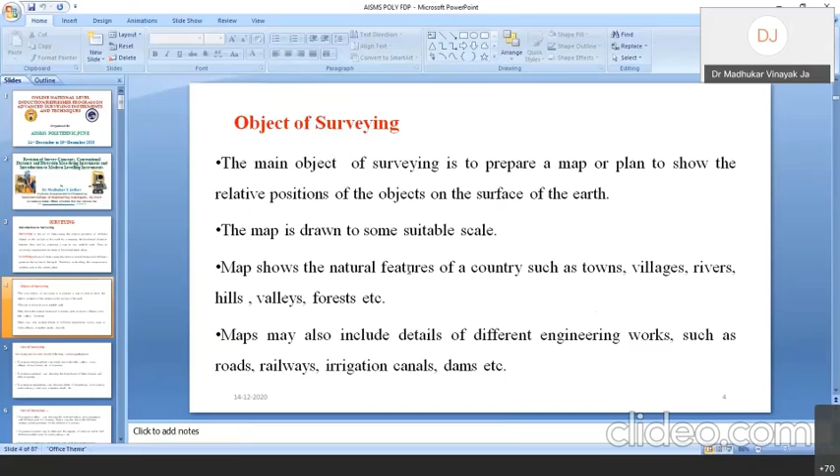Next, object of surveying. These objects of surveying are very much important as far as different applications of surveying are concerned. The object or purpose of surveying is to prepare a map or plan of a particular area. The map is drawn to a suitable scale. It shows the natural features of a particular area such as towns, villages, rivers, hills, valleys, forests, and so many other objects available in that area. Also, the map can include details of different engineering works such as roadways, railways, canals, dams, and other civil engineering projects.

Then uses of surveying, or we can say applications of surveying. In engineering, this surveying plays an important role, and there are various applications. The first application is to prepare a topographical map which shows the hills, valleys, rivers, villages, towns, forests, etc. of a particular area. By surveying that area, we can plot or show the details of hills, valleys, rivers, and so many other parameters or objects present in that area.

The second application is to prepare a cadastral map showing the details of boundaries of fields, houses, and other properties existing in that particular area. The third application is to prepare an engineering map showing the details of engineering works such as roadways, railways, reservoirs, canals, sewers, and so many others.

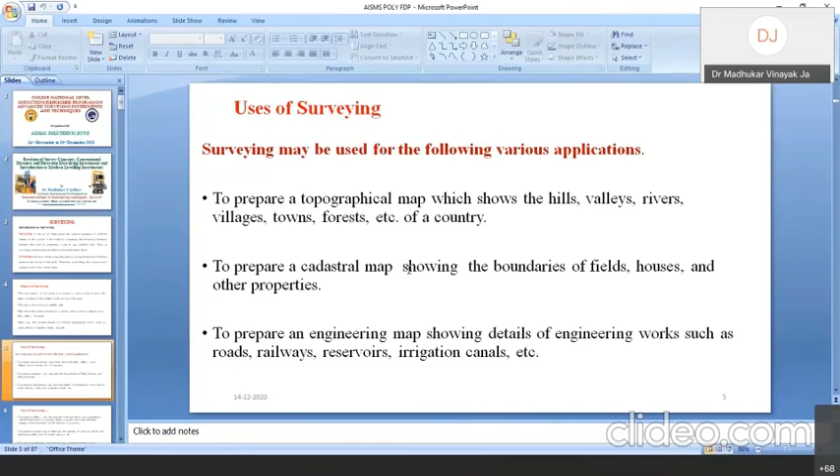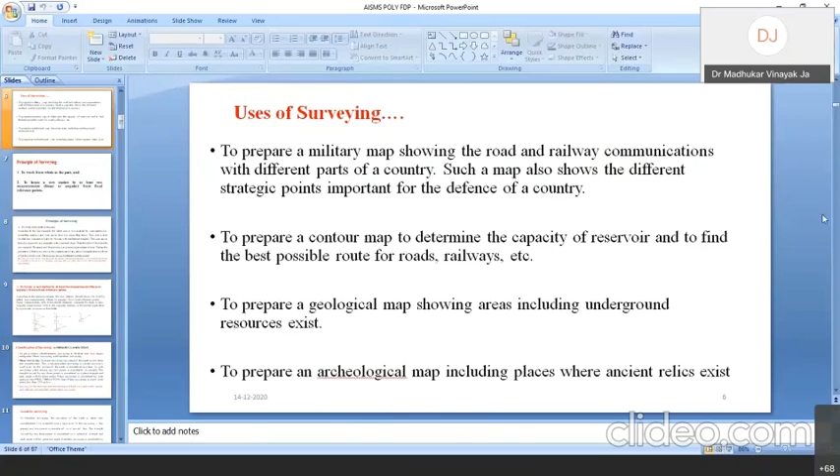Next application is to prepare a military map showing the roadways, railways, which are very much important for the military purpose. Also, such a map shows the different strategic points of importance for the defense of a particular country.

The next application is to prepare a contour map to determine the capacity of the reservoir and to find out the best possible route, maybe for roadway or railway, or also for canals and so many other civil engineering projects.

Next application is to prepare geological maps showing the areas including the underground resources, or we can say underground minerals which are existing below the ground.

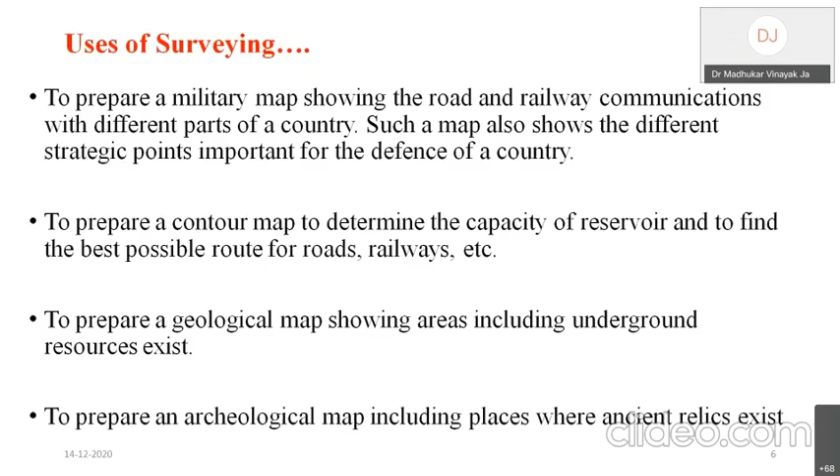The next application is to prepare archaeological maps showing the places of ancient importance which exist in a particular area. So these are the various applications of surveying used for different purposes in civil engineering.

Next important part of surveying is principles of surveying. These principles are very much important as far as surveying is concerned. In surveying, there are two important principles: one is to work from whole to the part, and second, to locate a new station by at least two measurements, maybe linear or angular, from a fixed reference point or fixed reference line.

Now we will see these principles one by one. First, to work from whole to the part. According to this principle, the whole area is enclosed by important points called control stations, and main survey lines called control lines. After that, this area is divided into a number of parts by forming well-conditioned triangles.

After that, measurement of the main survey line and measurement of whatever we have formed is taken using accurate instruments, and this is done to prevent the accumulation of error. During this procedure, if there is any error in the measurement of any side of the triangle, it will not affect the whole work. This error can always be detected and eliminated.

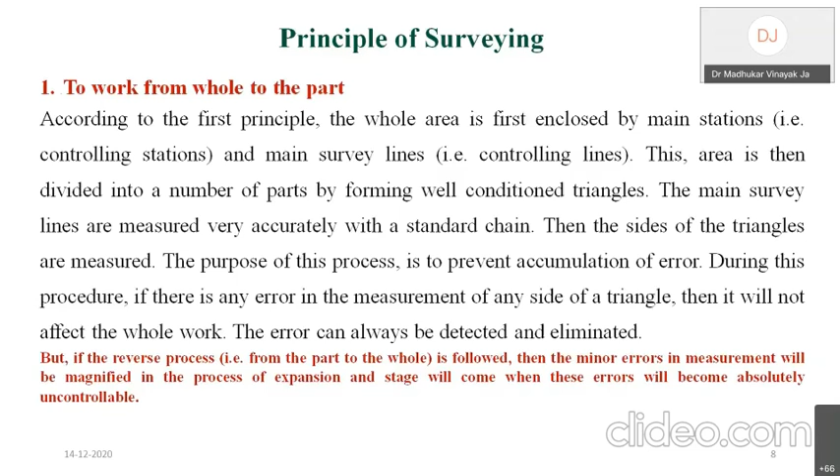To locate a new station.

Sir, Jadhav sir, sorry for the interruption, audio is breaking. Hello. Sir, are you mute? Sir, your audio is muted. Audible now. Hello, am I audible? Hello, no sir. Hello, yes sir. Yes, now audible, yes sir.

A new station by at least two measurements. So, as per this principle, a new station should be fixed by measurement from two reference points.

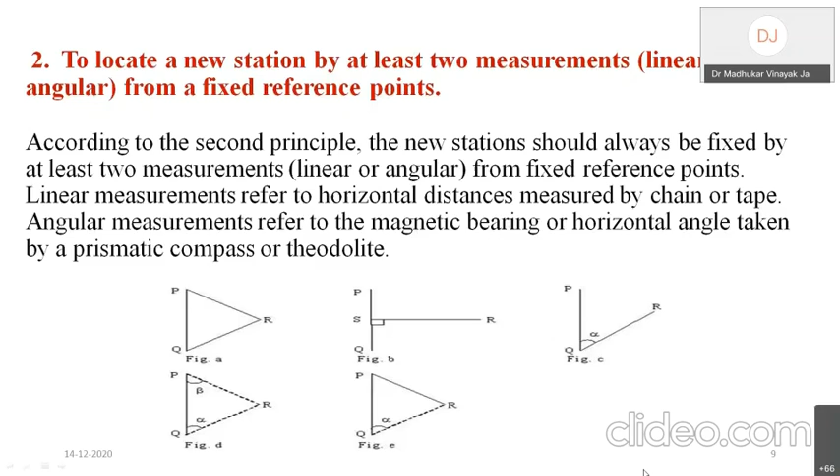Then next is classification of surveying. Whatever the different types of survey are there, we can classify survey mainly into two categories: first, primary classification, and second, secondary classification. We will see these one by one. First of all, primary classification. As per the primary classification, we can classify survey into plane surveying and geodetic surveying.

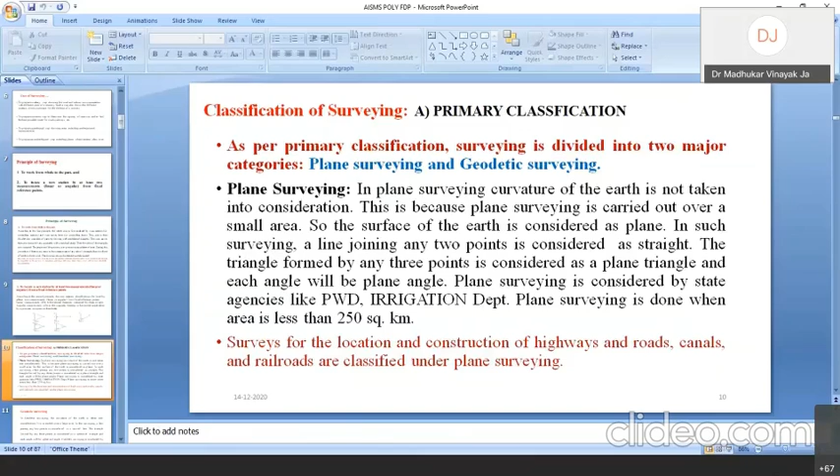First, plane surveying. In plane surveying, the curvature of earth is not taken into account, because plane surveying is carried out over a small area. The area under consideration is small, so the surface of earth is considered as a plane one. In such surveying, the line joining any two points is considered as a straight line. This plane surveying is conducted by state government agencies, maybe PWD, irrigation department, and is done when the area is less than 250 square kilometers. Generally, for the survey of highways, roadways, canals, this type of survey is done.

Then next is geodetic surveying. In geodetic surveying, the curvature of earth is taken into consideration, and this is extended over a large area. Meaning, when we want to do survey for a large area, we have to go for geodetic surveying.

In case of geodetic surveying, the line joining any two points is considered as a curved line, and the triangle formed by joining any 3 points is considered as a spherical triangle. The geodetic survey is conducted when the area exceeds 250 square kilometers, and generally this type of survey is performed by the Survey Department of India.

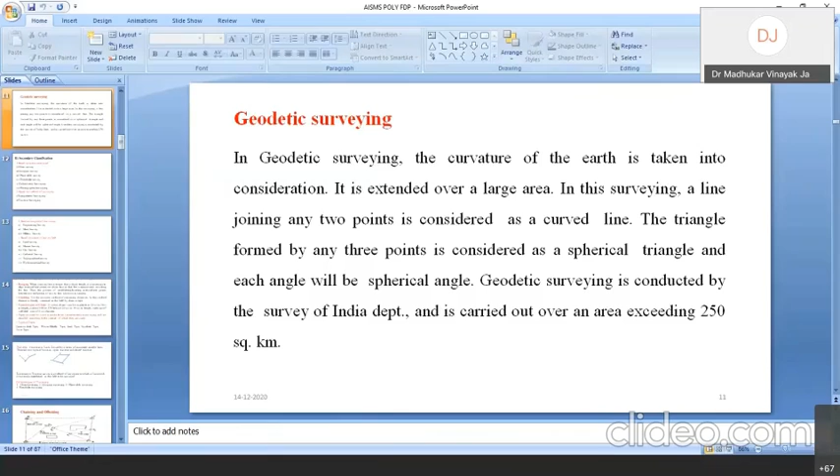So this is the main classification of surveying, that is, as per the primary classification, geodetic surveying and plane surveying. Then the next one is secondary classification. As per the secondary classification, we can classify the survey into different classes.

First, based upon the instrument used for the survey. When we are using the chain for surveying, that survey is called chain surveying. When we are using the compass, that particular survey is called compass surveying. So in this type of classification, the name of the instrument is given to that particular survey: chain survey, compass survey, plane table survey, theodolite survey, tacheometric survey, and photographic survey.

Next, based upon method of surveying. As per this classification, we can classify the survey into triangulation survey and traverse survey. In triangulation survey, we have to divide the area into a number of triangles, while in traverse survey, depending upon the project, the traverse may be open traverse or closed traverse.

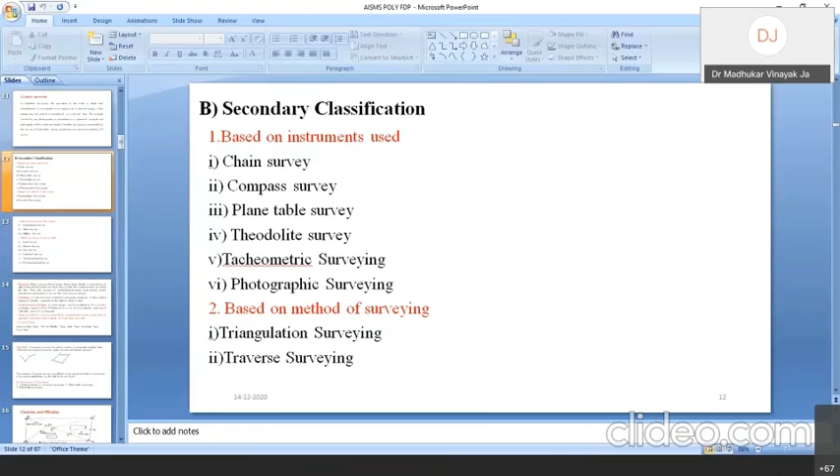Then the next classification is based upon the purpose of survey: engineering survey, mine survey, and military survey. And the last one is based upon the nature of the survey field, which can be classified into land surveying, marine surveying, city surveying, cadastral surveying, topographical surveying, and hydrographical surveying. So this is all about classification of surveying.

Then the next one is different terms used in surveying. Whatever different terms are used in surveying, I am going to discuss them in short.

First of all, ranging. When we want to measure the distance between any two points, we use chain or tape for the measurement of distances. Depending upon the distance between the first point and the last point, if it is more than one chain length or one tape length, we have to fix up intermediate points. The process of fixing up intermediate points between two endpoints of a survey line is called ranging of a survey line, or simply ranging. For ranging purpose, we have to use a ranging rod, a chain or tape, and arrows.

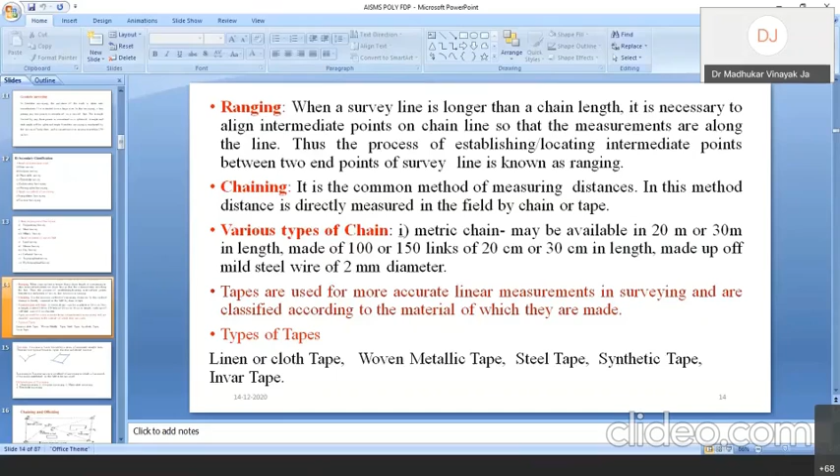Then there are different types of tapes which are used for accurate measurement of different survey lines. These tapes may be made from linen or cloth, may be a woven metallic tape or steel tape, or may be a synthetic tape or Invar tape.

Next, traverse. Traverse is nothing but a frame formed by a series of connected straight lines. This traverse may be of two types depending upon the type of survey: one is called open traverse and the second is called closed traverse. ABCD is this open traverse, and mainly for the survey of roadway, railway, canals, and sewer lines, we do the survey by means of open traverse, while for survey of dams and other surveys, we do the survey in the form of a closed traverse.

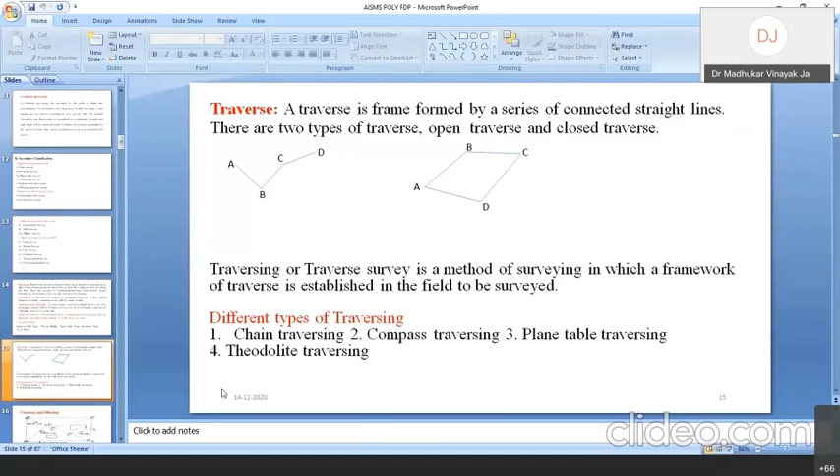Then depending upon the instrument used, there are different types of traverse. These are called chain traversing when we are using the chain for traversing purpose, compass traversing, plane table traversing, and theodolite traversing.

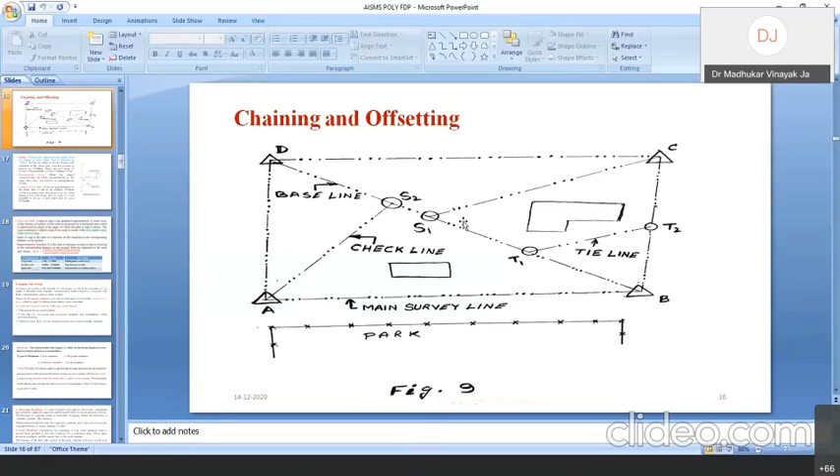Next one is the offset. Offset is a lateral measurement taken from an object to the chain line or survey line. There are two types of offset: one is called perpendicular offset and the other is called oblique offset.

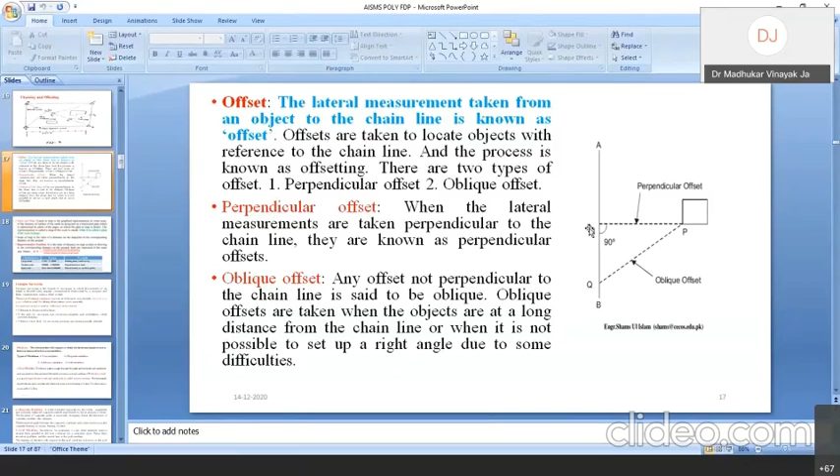In surveying, plan or map is the graphical representation. Whatever measurement we are doing, with that measurement we are plotting the map or plan with a suitable scale. This particular representation or plotting is called a plan if the scale is large, and is called a map when the scale is small.

Scale of a map is the ratio of distance on the map to the corresponding distance on the ground, or it is the distance on the plan to the corresponding distance on the ground.

An important thing in scale is the representative fraction. Whatever the scale of a map or plan, we always convert it to representative fraction, called RF. RF is the ratio of distance on the map, plan or drawing to the corresponding distance on the ground, with both distances expressed in the same unit. Hence RF is equal to the length of the object on the drawing to the actual length of the object on the ground.

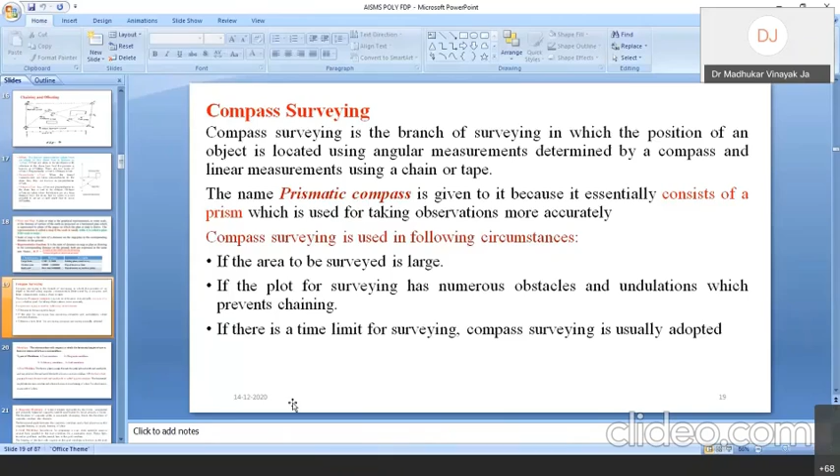The prismatic compass is graduated from 0 to 360 degrees clockwise, with graduations starting from the south end of the needle. See how the graduations are written on this particular ring: 0 is placed at south, 90 degree at west, 180 degree at north, and 270 degree at east.

The degree markings on the prismatic compass are divided either into half degree or into 20 minute intervals, and depending upon that, the least count of the particular prismatic compass is decided.

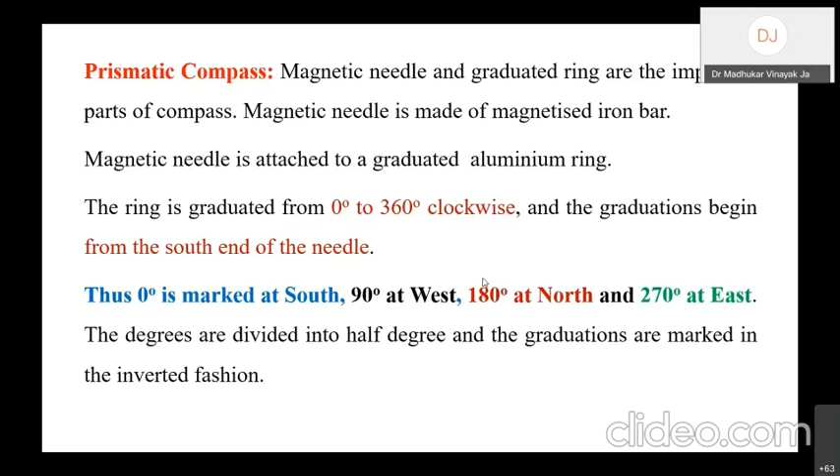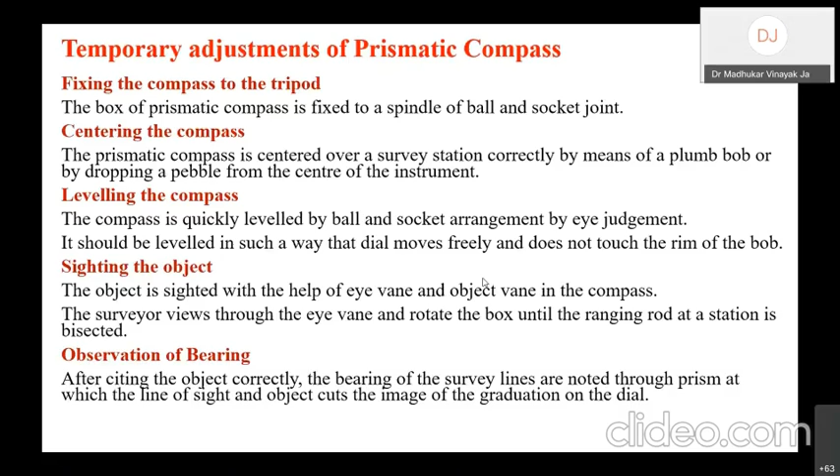When we want to use the prismatic compass for surveying purposes, we have to perform temporary adjustments. These include fixing the prismatic compass on the tripod stand, centering it, leveling it with the help of the ball and socket arrangement, sighting the object, and finally observing the bearing. All these temporary adjustments need to be performed when we want to measure the bearing of any survey line or perform survey work with the prismatic compass.

In compass survey, generally we use two types of compass: one is called the prismatic compass and the other is called the surveyor's compass. Mostly today we use the prismatic compass.

There is a difference between the prismatic compass and surveyor's compass. The first point of difference is that in the surveyor's compass, the needle is of edge bar type and also acts as an index, while in the prismatic compass, the needle is broad needle type but does not act as an index.

The second point of comparison is that the graduated ring is attached to the box and not to the needle in case of surveyor's compass, while in the prismatic compass, the graduated ring is attached with the needle, or you can say with the magnetic needle.

The third point of comparison is that the graduations in the surveyor's compass are in the quadrantal system, so the value of the bearing varies from 0 to 90 degree only, while in the prismatic compass the graduations are in the whole circle bearing system, so the bearing varies from 0 degree to 360 degree.

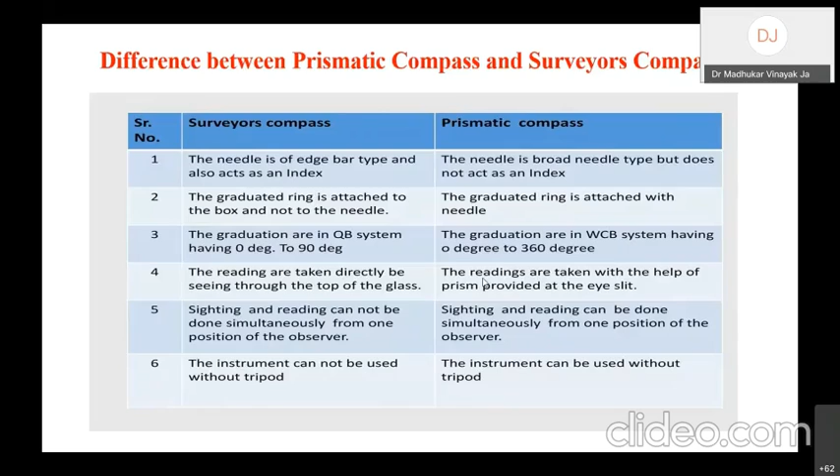Now let's compare whole circle bearing and quadrantal bearing. As we know, for measuring the whole circle bearing we use the prismatic compass, while for measuring the quadrantal bearing we use the surveyor's compass.

The horizontal angle made by any survey line with magnetic north in the clockwise direction is called the whole circle bearing, while the horizontal angle made by any survey line with north or south is called the quadrantal bearing, also known as reduced bearing.

The whole circle bearing is always measured clockwise with reference to the north direction, while the quadrantal bearing can be measured either clockwise or anti-clockwise, whichever is nearer to that particular line.

The value of the whole circle bearing varies from 0 to 360 degree, while the value of the reduced bearing varies from 0 to 90 degree.

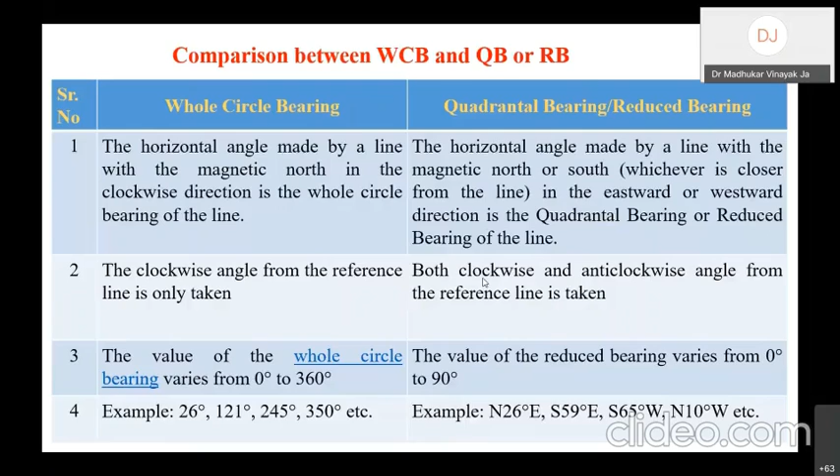In this sketch, how the whole circle bearing is measured is shown - it is always measured from north up to that particular line. The quadrantal bearing is measured either with respect to north or with respect to south, whichever is nearer to that particular line. The second sketch shows the reduced bearing.

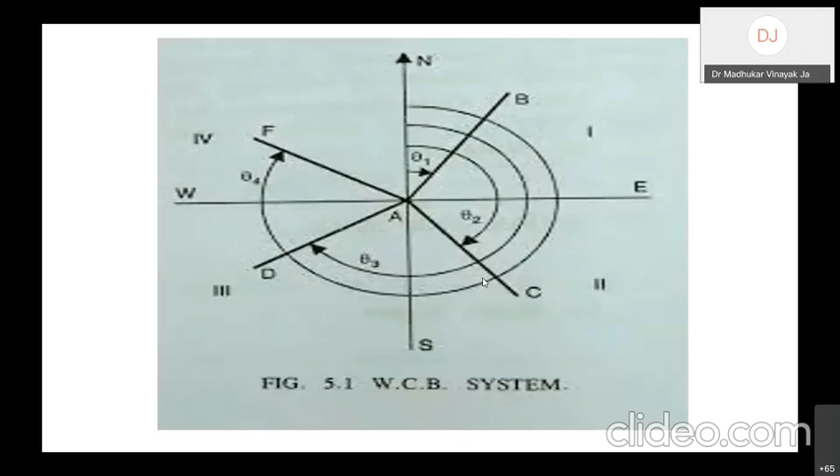Here the whole circle bearings are shown depending upon the position of the line. If the line is in the first quadrant, the angle θ1 is the whole circle bearing. When the line is in the second quadrant, θ2 is the whole circle bearing. When the line is in the third quadrant, θ3 is the whole circle bearing. And when the line is in the fourth quadrant, θ4 is the whole circle bearing of that particular line.

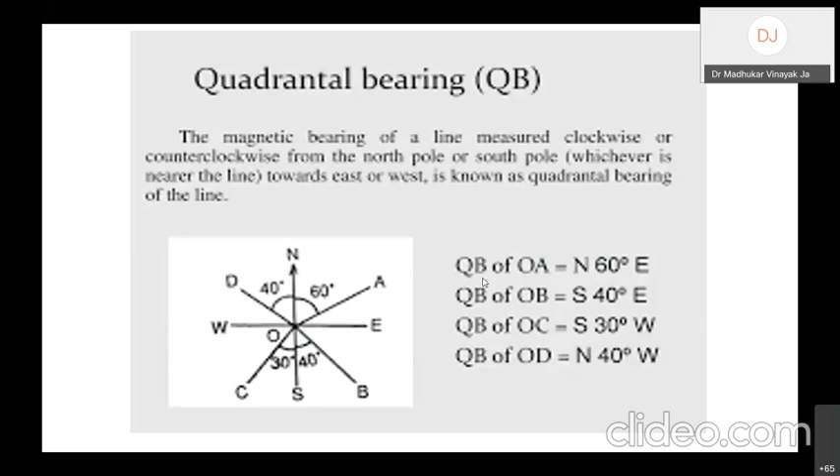Here the quadrantal bearings of different lines, depending upon the position of lines, are shown.

For the second quadrant, quadrantal bearing is equal to 180 minus whole circle bearing. For the third quadrant, reduced bearing or quadrantal bearing is equal to whole circle bearing minus 180 degrees. And for the fourth quadrant, reduced bearing or quadrantal bearing is equal to 360 degrees minus whole circle bearing.

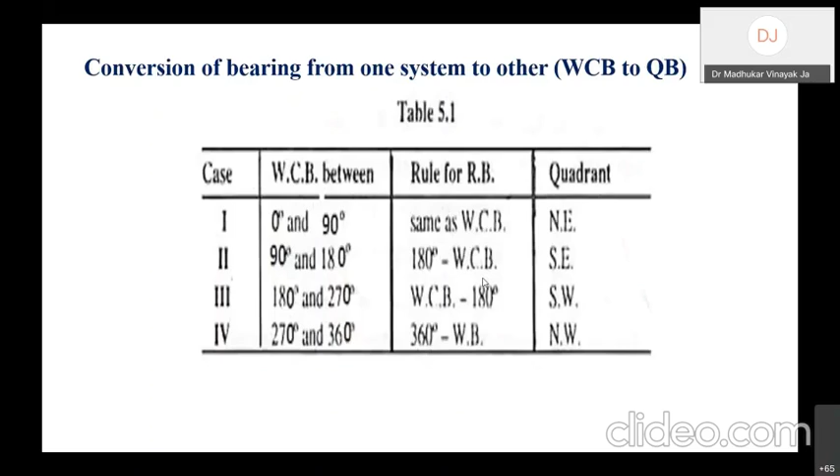Fore bearing and back bearing. This particular concept plays a very important role as far as prismatic compass survey is concerned. Fore bearing is nothing but when we are measuring the bearing of a survey line in the direction of progress of that particular survey line; that is called fore bearing.

As per trigonometry, fore bearing and back bearing always differ by 180 degrees. Hence we can write the formula: back bearing of a survey line is equal to fore bearing plus or minus 180 degrees. This is a very important formula. Once fore bearing is known, we can find out its back bearing, and if the back bearing is known, we can find out its fore bearing.

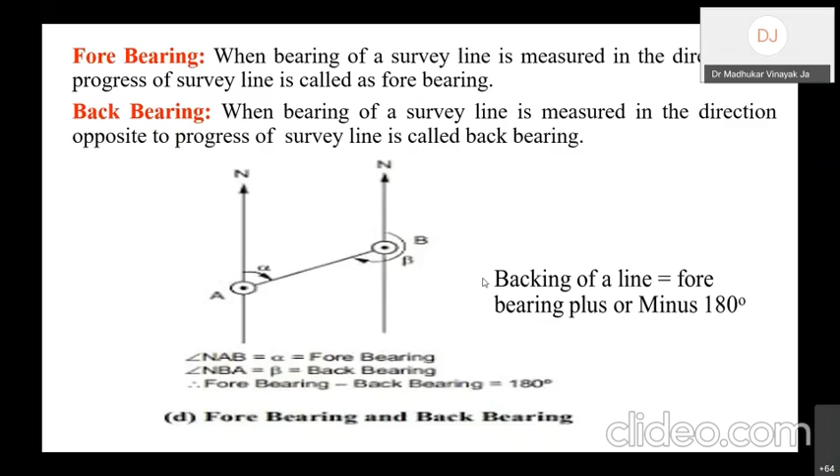In case of prismatic compass survey, local attraction plays a very important role. Depending upon the local attraction, whatever readings we are taking may be correct or incorrect. While performing the survey, the magnetic needle sometimes gets disturbed from its normal position under the influence of some attractive forces. Such influencing force is called local attraction, and due to that, there may be error in the observed fore and back bearing of the line, so the observed fore bearing and back bearing will not be the correct ones, and hence the difference in fore bearing and back bearing will also not be correct.

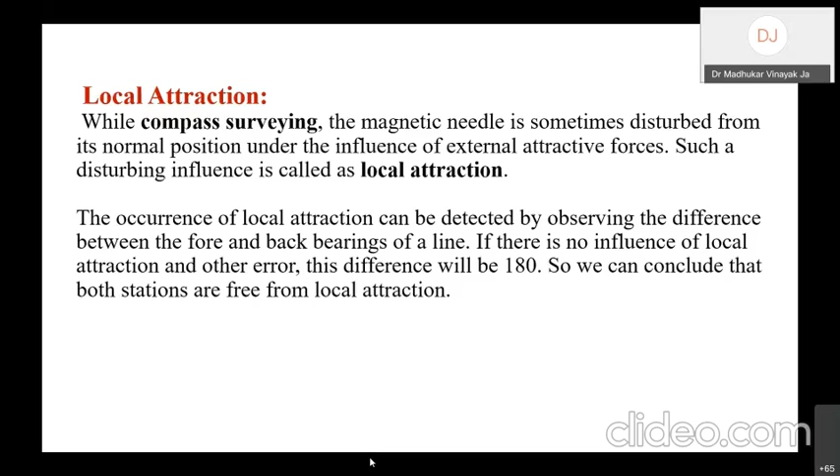Hence, when we want to go for plotting, we have to find out the local attraction at that particular station, and then correct whatever observed fore bearing and back bearing of different lines by applying the local attraction correction to that particular points or stations.

Declination. This concept of declination is also one of the important concepts as far as compass surveying is concerned. The horizontal angle between the magnetic meridian and the true meridian is known as magnetic declination. Depending upon the position of magnetic north, there may be a magnetic declination, either towards the east side or towards the west side. When we want to find the true bearing of a survey line, we use the formula: true bearing of a survey line equals magnetic bearing of a survey line plus or minus magnetic declination. We use the plus sign if the declination is towards east, and the negative sign when the declination is towards west.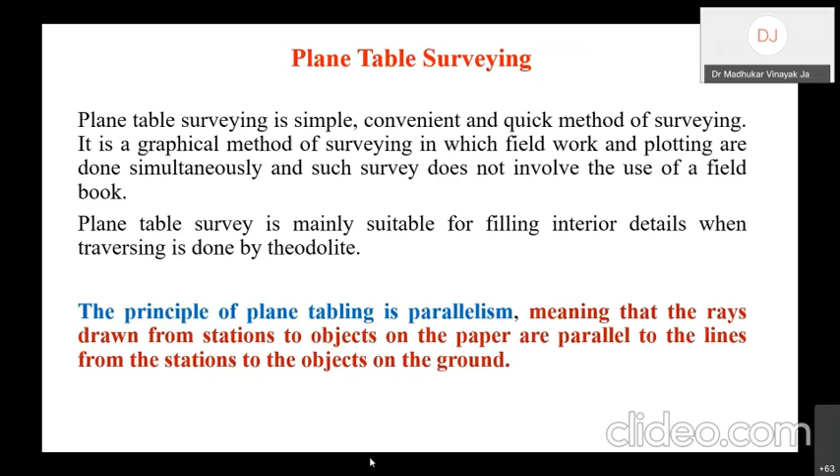Now this plane table survey has one important principle: the principle on which plane table survey depends is parallelism. That is, the rays drawn from the station to the object on the paper are parallel to the line from the station to the object on the ground. So on this particular principle, all the methods of plane table survey are working.

Different accessories which are used in plane table survey. So plane table or drawing board.

This particular plane table has a size of 750 mm by 600 mm and it is made from well seasoned teak wood or pine wood. The top of this table is made plain, and at the bottom there is an arrangement to fix this drawing board or plane table on the tripod stand with the help of a wing nut. Another accessory is called the spirit level, used for leveling the table.

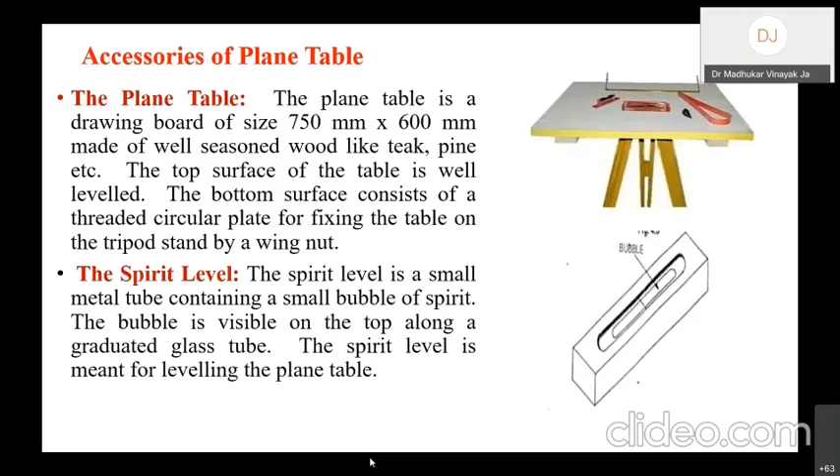Alidade plays a very important role as far as plane table survey is concerned. There are two types of alidade used in plane table survey: plain alidade and telescopic alidade. When the extent of survey is small, we use the plain alidade, and when the survey covers more length, the telescopic alidade is used.

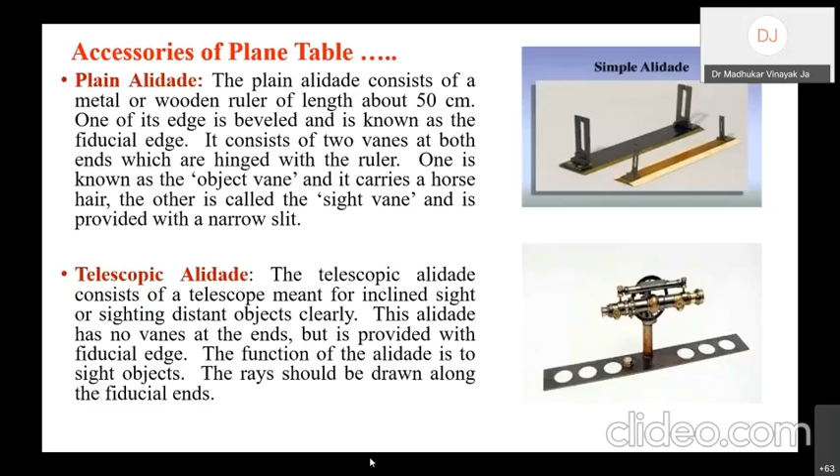In case of plain alidade, there are two vanes: one is called the object vane and another is called the eye vane. With the help of these two vanes, we can sight different objects while performing the plane table survey.

The next accessory used with plane table survey is the trough compass. Mainly for marking the north direction, we use this trough compass, which contains a magnetic needle.

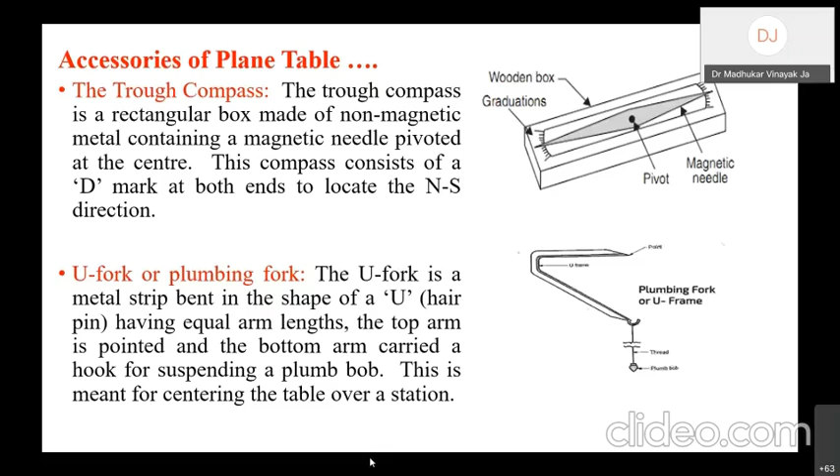The next important accessory used in plane table survey is called the U fork or plumbing fork. As the shape of this is like the letter U, it is called the U fork or plumbing fork. This tool is mainly used for transferring a ground point onto the drawing sheet, or a point that already exists on the drawing sheet onto the ground. So the U fork is very important for transferring a point from ground to sheet or from sheet to ground.

Uses of plane table survey: a compass survey cannot be carried out in industrial areas of a town because in industrial areas there are steel structures, and due to these steel structures there may be chances of local attraction in the observed reading. Hence, in such areas plane table is more suitable.

Also, plane table can be used for preparing small and medium scale maps where great accuracy is not required. This plane table survey is speedy, easy, and fairly accurate for doing the survey. Plane table can also be used to plot a developed area on the previously plotted plan of an existing area.

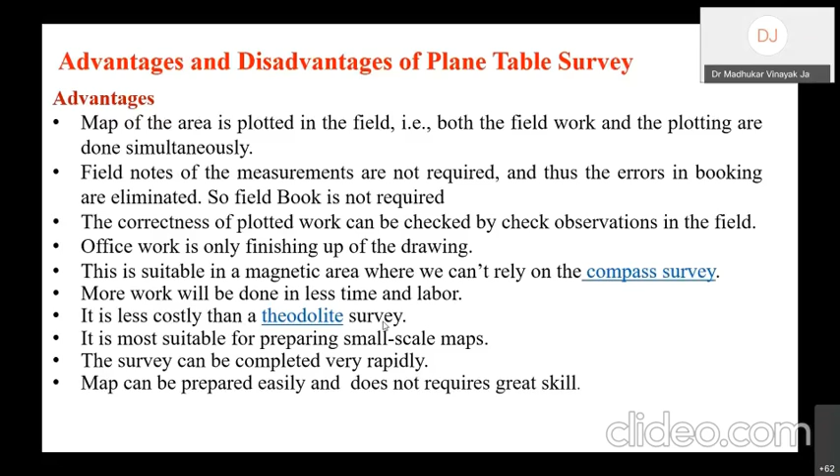Also, this survey is done within a short period of time, and the labor force required is less in number. When the budget allotted for the survey is less, we can use plane table survey instead of theodolite survey. It is also the most suitable method for preparing small scale maps, can be completed rapidly, or at a fast rate, and the map can be prepared easily without requiring great skill.

Disadvantages: Plane table survey is not suitable for work in wet climate, rainy season, and places where high wind predominates. If the area to be surveyed is large, frequent changes in the size of drawing sheets are required, so in such an area it is not possible to perform the plane table survey.

If the sun is bright, plotting may be difficult due to the strain on the eyes. Also, it is not very accurate for large scale survey as compared to compass and theodolite survey.

Another disadvantage is that the instrument and its accessories are heavy and cumbersome, and there may be chances of loss of any of the accessories. Lastly, since the field notes are not maintained, it is inconvenient to calculate quantities or to replot the survey to a different scale if required.

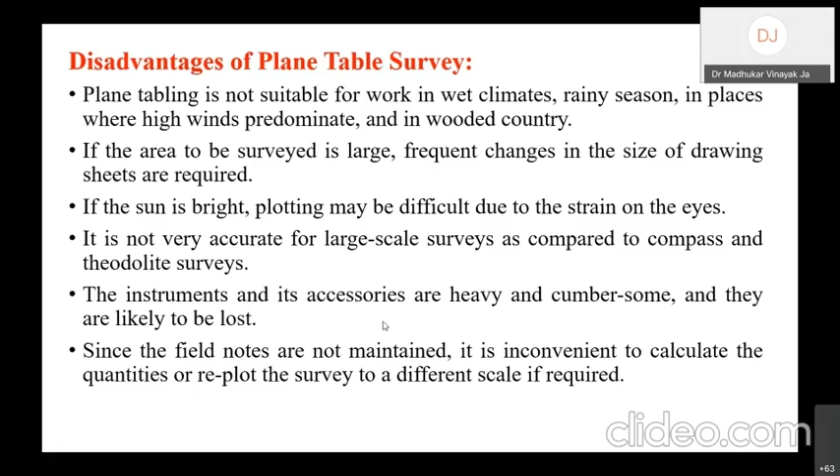So all these are the different disadvantages of the plane table survey.

Procedure for setting up of the plane table survey: first, select the station. Then set the plane table on the selected station and fix the plane table on the tripod stand. Then level the table properly, fix up the drawing sheet on the plane table, and properly center the plane table on the given station. Then, most importantly, mark the north direction.

Depending upon the different stations, we have to go for orientation of the plane table. When plane table survey is conducted by connecting several stations, after shifting the plane table we have to do the orientation, which means keeping the table parallel to the line drawn from the previous station.

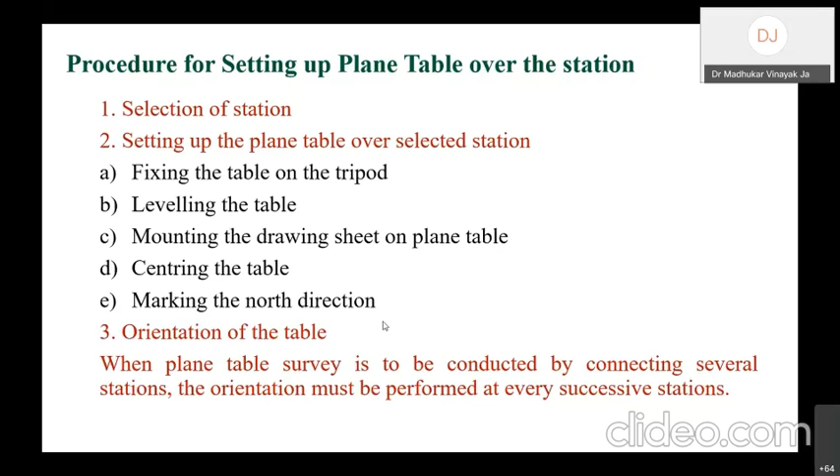Orientation of the plane table can be done by two methods: one with the help of a magnetic needle, and the second by the backsighting method. I will go somewhat fast because the time required for the presentation is more than what is left.

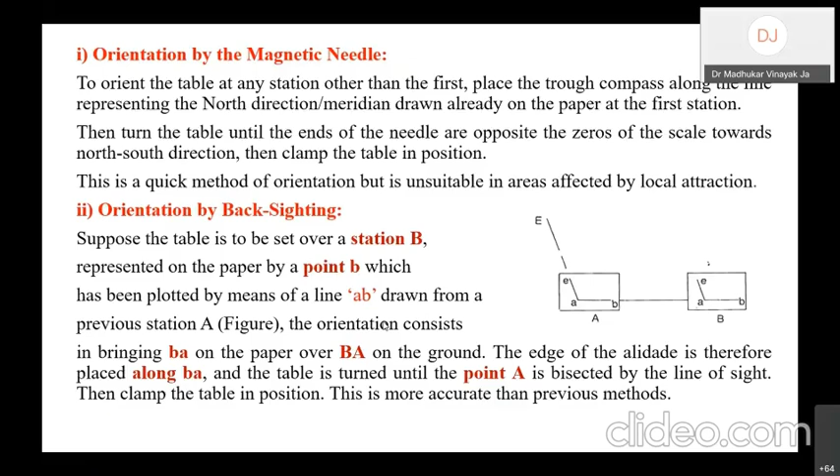Methods of plane table survey: plane table survey can be performed by four methods. One is the radiation method, second is the intersection method, third is the traversing method, and fourth is the resection method. Out of these, we will see the first two methods in short, starting with the radiation method.

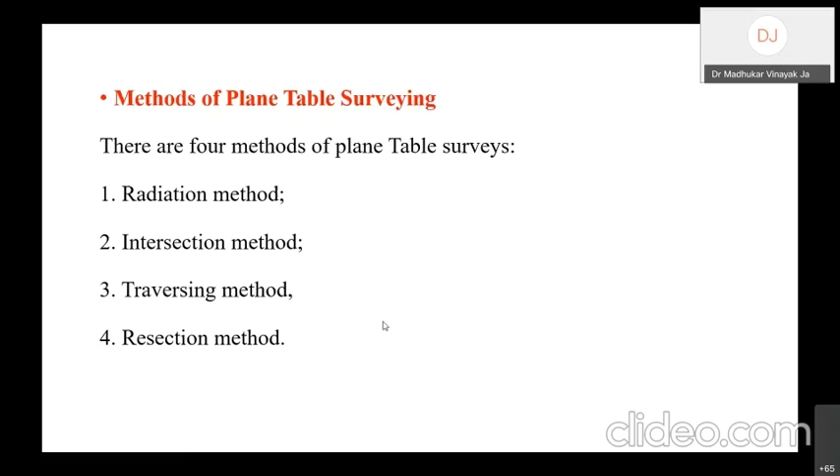In the radiation method, we select the station such that the boundary points of the area can be seen from it. For example, we select P as the plane table station, with boundary stations A, B, C, D, E. We set the table at point P, fix ranging rods at A, B, C, D, E, sight these points with the alidade, measure the distances from P to each point, and plot them with a suitable scale. Then we join station A to B, B to C, C to D, D to E, and E to A, to get the map or plan of the area by the radiation method.

Second method: the intersection method.

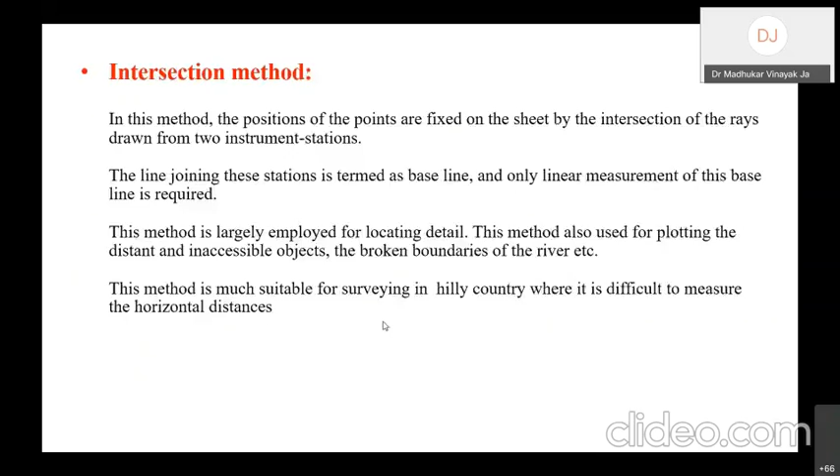In the intersection method, we select a number of stations depending upon the extent of the area. First, we set the table at the first station, and after leveling and centering, fix up the drawing sheet and mark station A on it. From this, we sight the second station B, and at the same time sight the last station, say E. Then we sight the remaining stations, maybe C, D, and whatever other stations are available in that area. After that, we shift the table to point B.

After setting the table at point B, we orient the table, either by the backsighting method or by the magnetic needle method, and again sight the different points. By intersection of the rays from point A and rays from point B, we get the positions of different points, maybe C, D, and E. After joining these points on the drawing sheet, we get the area plotted as A, B, C, D, E. So in this method, only the length of the baseline is measured, and other points are obtained by the intersection of rays from A and B. This method is called the intersection method.

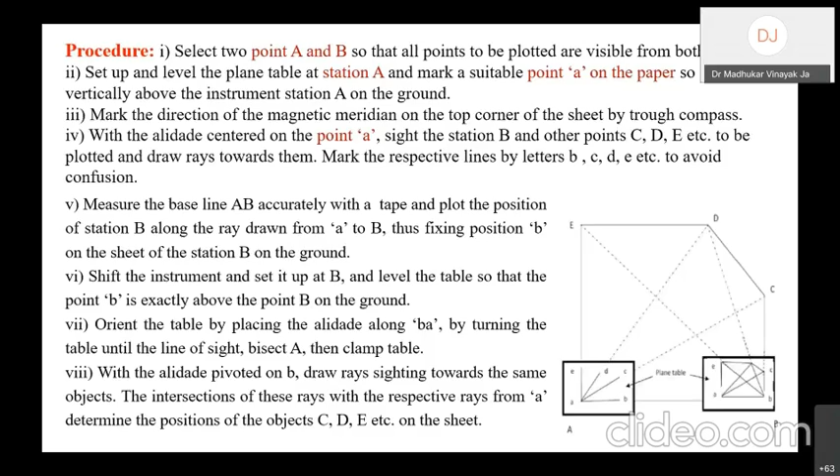This is the traversing method, which I will not discuss further.

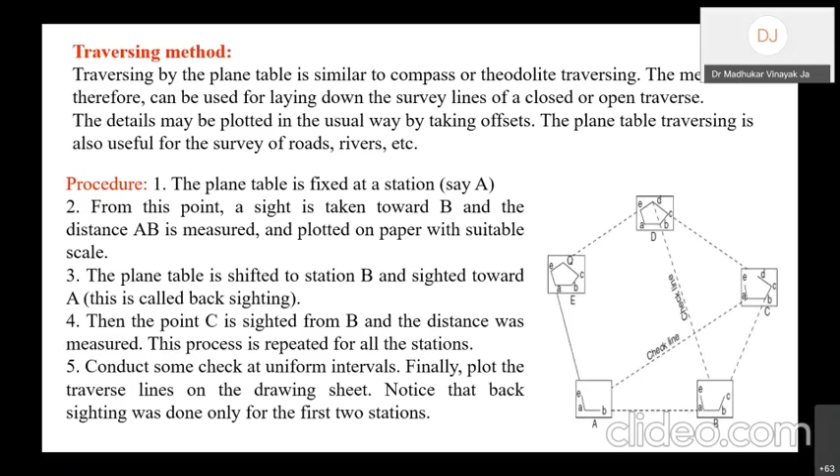Next slide. So we have seen compass surveying and the plane table survey.

Next, we are going to study in short regarding leveling. Leveling is the branch of surveying which deals with finding the elevations of given points with respect to a given or assumed datum, or the process of determining the heights of one level relative to another level. Leveling is defined as an art of determining the relative heights of different points on, above, or below the surface of Earth. Hence, leveling is nothing but measurement in a vertical plane.

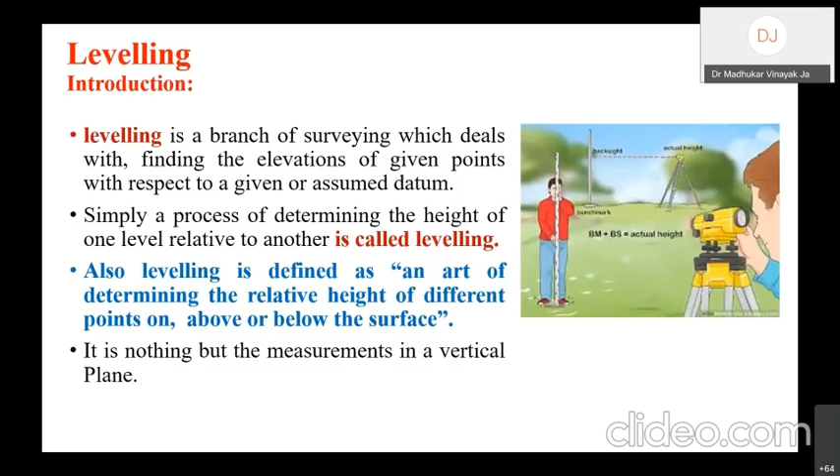Next slide, please. In leveling, datum plays a very important role. Datum is any reference surface to which elevations are referred. The mean sea level is a convenient datum surface with respect to which elevations or heights are commonly measured. A datum plane or datum is an arbitrarily assumed level surface or line with respect to which levels of different surfaces are calculated. When the Britishers ruled our country, they took the datum surface of sea level at Karachi. But after independence, we have selected the mean sea level at Mumbai as the datum surface.

Next slide, please. Mean sea level is an average level of the surface of one or more of Earth's bodies of water, from which heights such as altitudes or reduced levels of different points are measured.

This mean sea level is very important as far as benchmarks are concerned. In leveling, benchmark plays a very important role. A benchmark is a fixed reference point of known elevation, and the leveling operation is always started from such points, and leveling work may end on a point of known elevation. On every railway station, the Britishers have written the mean sea level to know the elevation of that particular junction, or to know the position of that particular station with respect to mean sea level.

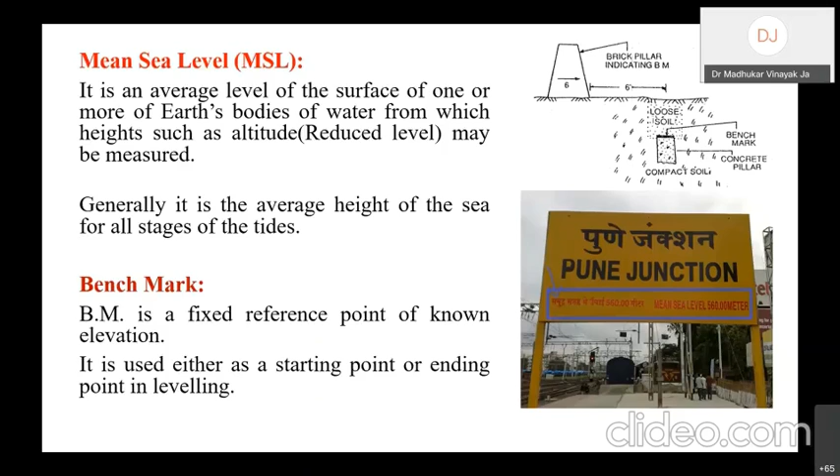Next slide, please. Benchmarks play a very important role as far as leveling operations are concerned. There are 4 types of benchmark. One is called the GTS benchmark. Second is the permanent benchmark. Third is the arbitrary benchmark. And fourth is the temporary benchmark.

Depending upon the accuracy of the work, we have to select either GTS benchmark, permanent benchmark, arbitrary benchmark, or temporary benchmark. These GTS benchmarks are established by the Survey Department of India throughout the country, and the values of these benchmarks are published in the catalog published by the Survey Department of the area.

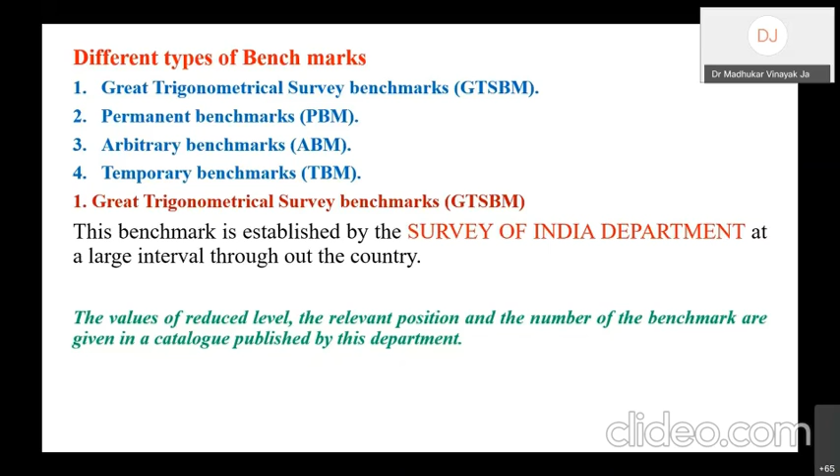Next, permanent benchmark. These are the fixed points or marks established by state government agencies, maybe the public works department or irrigation department. The reduced levels of these points are determined with reference to the GTS benchmarks, and the reduced levels are marked on permanent objects such as the plinth of a building, the parapet wall of a bridge, or a culvert in that particular area.

Then the third type of benchmark is called ABM, arbitrary benchmark. When small ordinary leveling work is to be carried out, or when the permanent benchmark is not nearby the area where the survey is to be carried out, we have to start the leveling work from any prominent object in that area, say, for example, the plinth or step of a building. Such a chosen benchmark is called an arbitrary benchmark.

Next, temporary benchmark. Next slide, please.

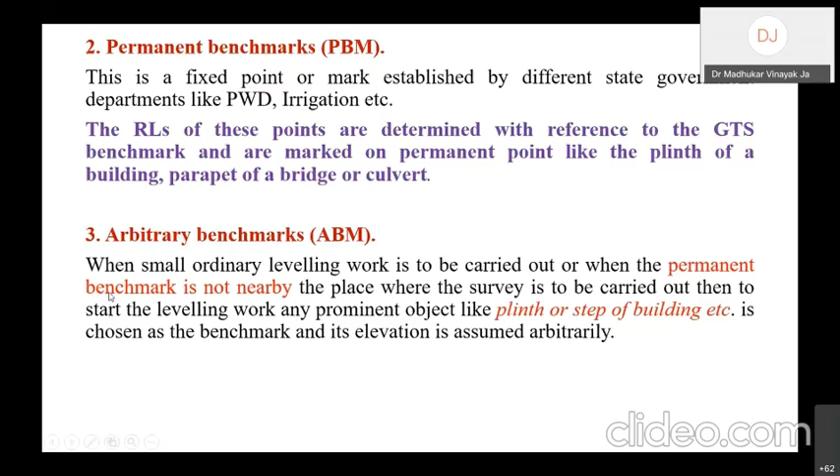Temporary benchmark: the survey for large projects normally continues for a number of days. Hence, at the end of the day, when the leveling work has completed or stopped, any permanent object nearby is chosen on which the day's work is stopped, and on the next day, the leveling work is started from that particular object or point. So such an object or point is called TBM, temporary benchmark. This is all about the different types of benchmarks.

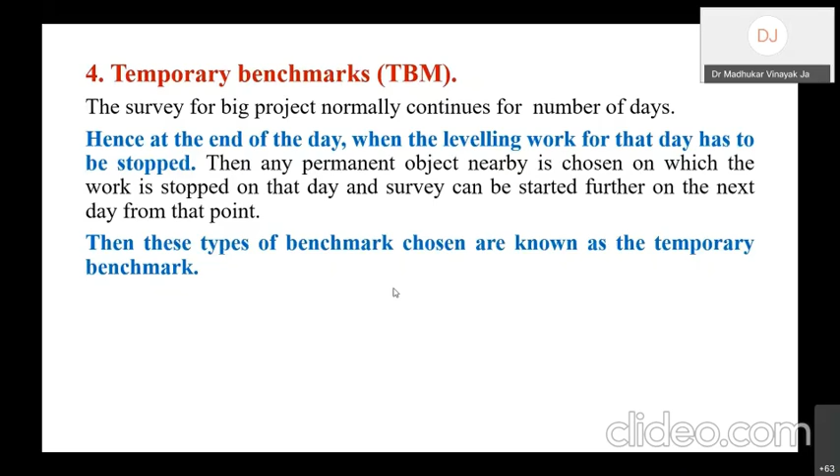Important terms related to leveling. First term is line of collimation or line of sight. This is nothing but the line joining the intersection of crosshair of diaphragm to the optical center of the objective glass and its continuation.

Next one, height of instrument. When the instrument is properly leveled, the reduced level of the line of collimation is known as height of instrument, or HI. So HI is nothing but backsight reading plus RL of benchmark.

Next one is the backsight reading. The first reading taken on a point of known elevation is known as backsight reading, or after the change of instrument, whatever reading is taken is also called backsight reading. So in this figure, this is the benchmark, and the first reading taken on the benchmark is known as backsight reading.

Then whatever other readings are there are called intermediate sight readings. And the last reading taken from the first instrument position is known as foresight reading. After that, the instrument is shifted to the second position, and after leveling at the second position, the reading taken is called a change point. That reading is also called backsight reading.

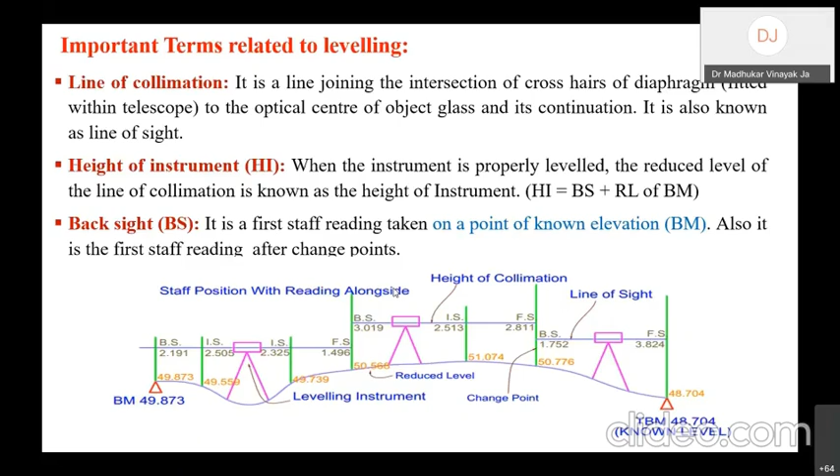Foresight reading, intermediate sight, and change point.

Leveling. Now, for leveling purpose, we require a level and a leveling staff. The level is nothing but an optical instrument used to establish or verify points in the same horizontal plane, and this process is called leveling.

This level is used with a leveling staff. Now, the level which we are using has different parts. The most important part of the level is the telescope, and this provides the horizontal line of sight. The level also consists of a leveling tube, with the help of which we make the line of sight horizontal.

Then another important part of the level is called the leveling head. With the help of this leveling head, we can level the instrument. Next important part of the level is the tripod stand, and with the help of this tripod stand, we can fix up the instrument.

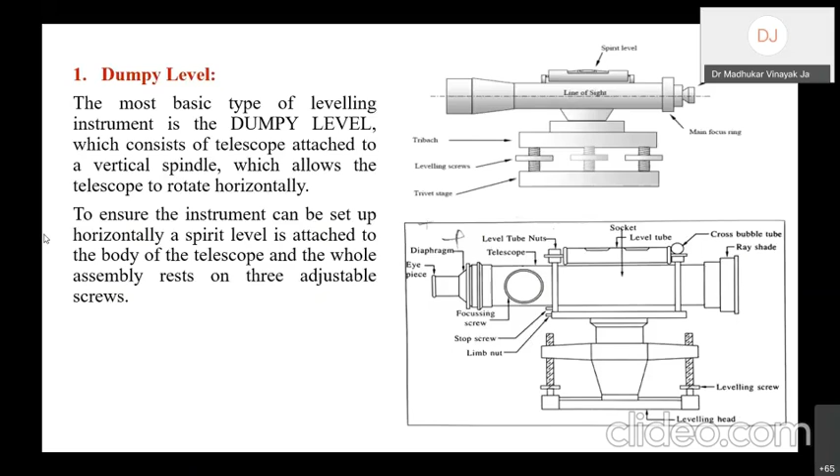Again, these are the various parts of dumpy level: telescope, bubble tube, compass, vertical spindle, trivet stage, foot screws, leveling head, and the tripod stand.

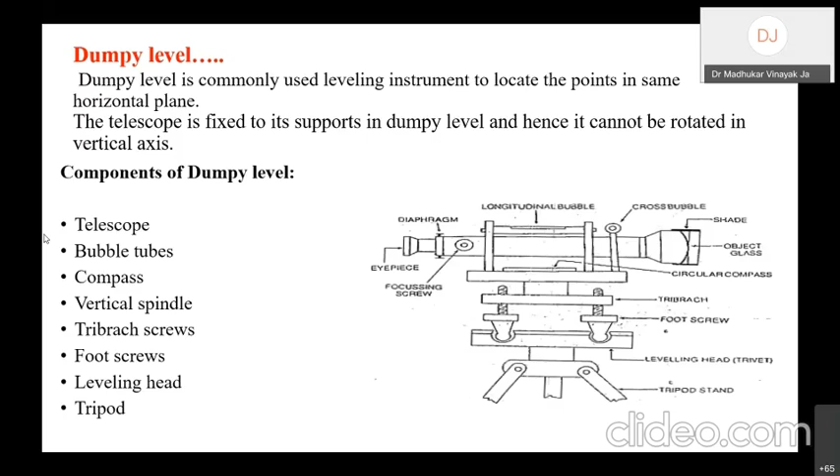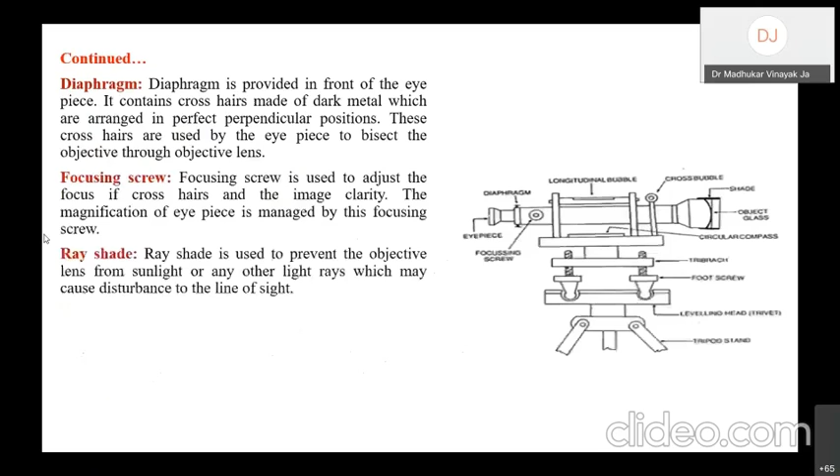So these are the different parts explained in short.

This is important: classification of level, or types of level. Leveling has been classified into different types depending upon the purpose for which it is carried out. So the different types of leveling: one is simple level.

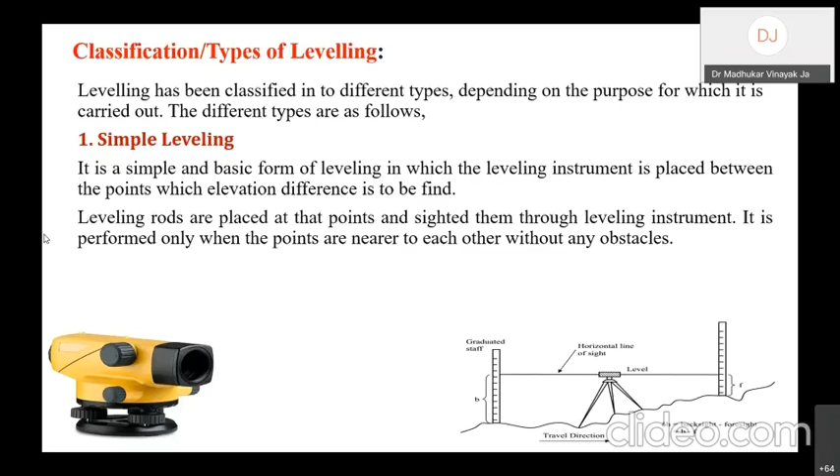So when the distance between the two points is less, in that case we perform the leveling called simple leveling. In case of simple leveling, we are not changing the instrument.

Differential leveling is performed when the distance between the two points is more. As shown in figure, between the first point and the last point, the distance is more. In such cases, we have to go for differential leveling.

Next, when the difference of elevation between the first point and the last point is large, in that case also we have to go for differential leveling. Also, when there are more obstacles between the first point and the last point, in that case also we have to go for differential leveling.

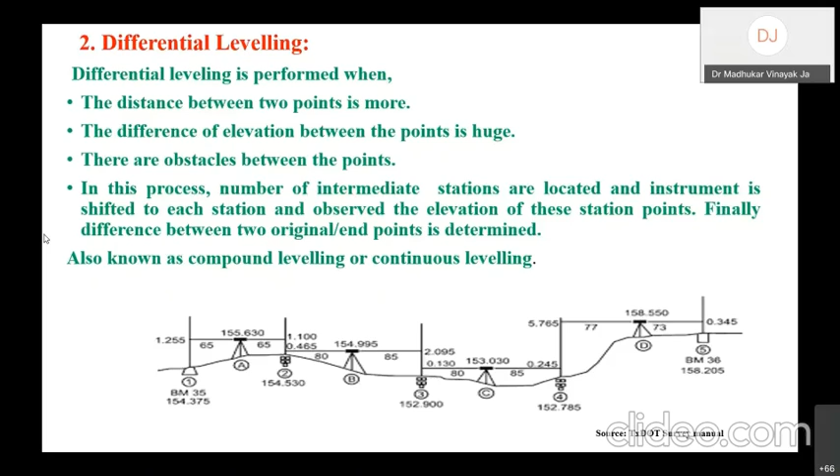In this process, a number of intermediate stations are located, and the instrument is shifted from one station to another to find out the level difference between the first point and the last point. As shown in figure, the instrument is set at first, then at second, at third, at fourth, and so on to reach the last point. By finding out the elevations of different points, we can find out the level difference between the first point and the last point. This type of leveling is called differential leveling.

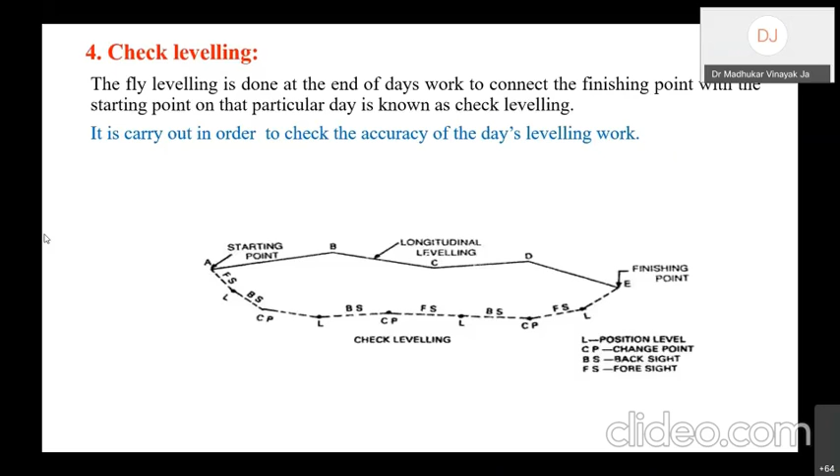If we get the same reduced level as what is the level of the first point, then that particular leveling is called check leveling, and the work we have performed is correct. If there is a large difference, then we have to repeat that particular work. This is called check leveling.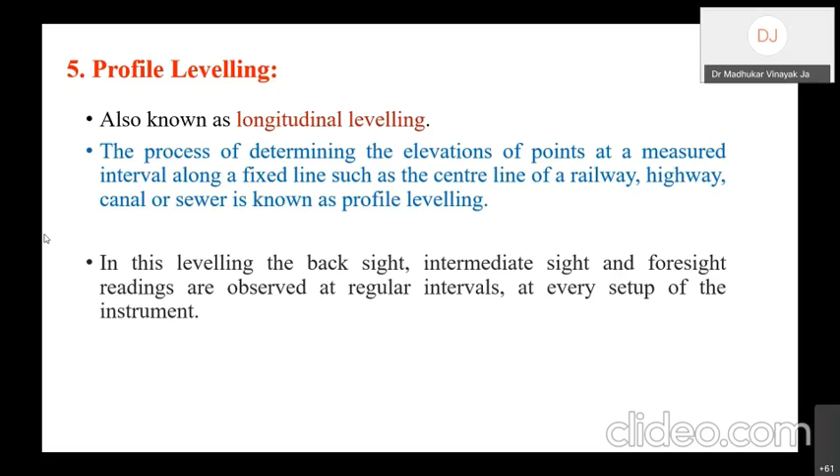In this particular leveling, we have to take backsight and intermediate sight at regular intervals, and for that purpose, we have to shift the instrument depending upon the requirement.

Now we have to take the measured distance, and at that particular measured distance, we have to hold the staff and take the reading. Whatever the data of distances and readings we obtain, we have to fill that up properly in the level field book page.

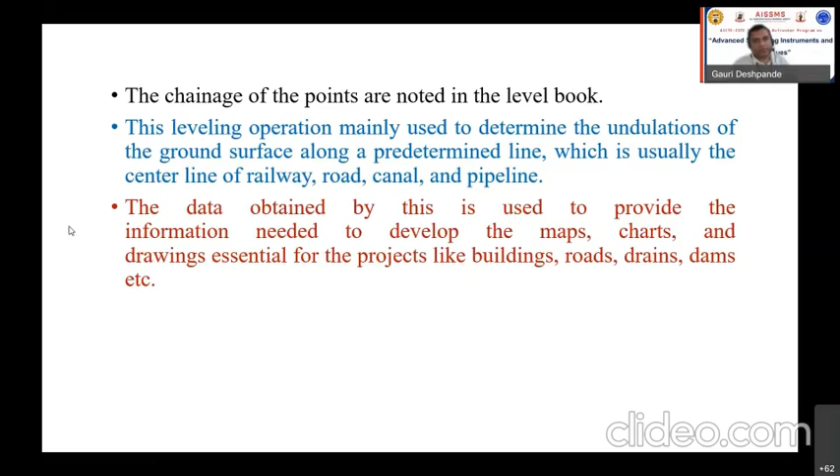Am I audible? Hello, Tapekar sir. Hello. Previous slide. Sir, audio is not clear. Hello? Hello? Sir, am I audible? Not clear, sir. Yes, yes, now, sir. Now audible, Tapekar sir. Yes, sir. Next slide, please. Yes, sir. Audible now. Next slide, please. Yes, sir.

So this is the cross sectioning. When we want to know the nature of the level at a perpendicular to the center line of that particular project, that particular leveling is called cross sectional leveling.

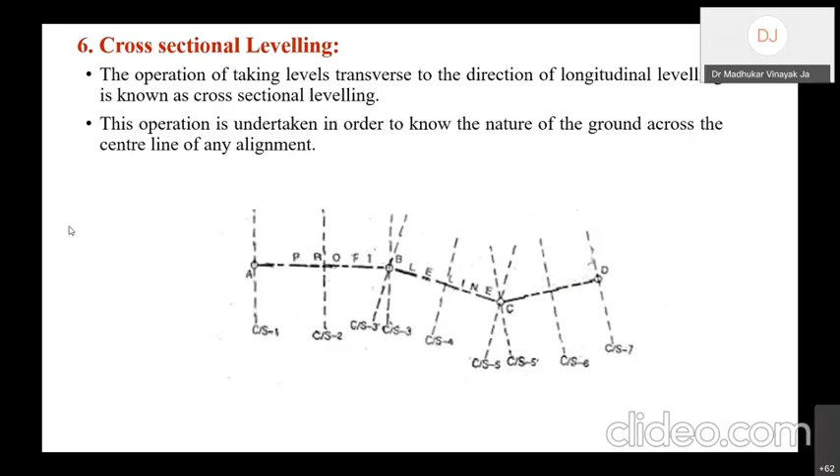Reciprocal leveling: when we want to find out the level difference between two endpoints on the bank of a river, in that case we have to take the reading from the dumpy level on the staff held very near to the first bank and on the other bank. Such a type of leveling is called reciprocal leveling.

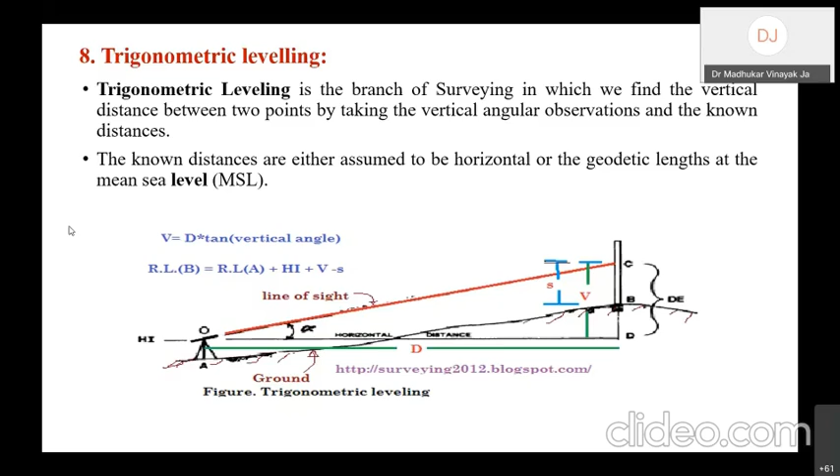So this is all about leveling. The next one is the auto level. In case of auto level, there is a provision of tilt compensator. With the help of this tilt compensator, if the line of sight is slightly disturbed, it may get automatically horizontal. This is the beauty of auto level. So auto level is one of the instruments used for fast taking of levels of different points, and even though there is a slight disturbance in the line of sight, it will get automatically horizontal.

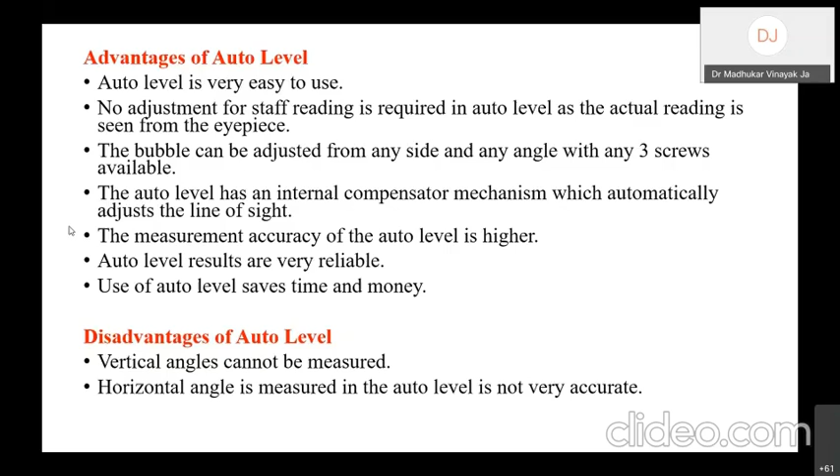Laser level is another type of modern level used for leveling purpose. It uses an amplified, focused beam of light emitted from a solid state device called a diode, also known as LED. The beam emitted from this level can be used for bisecting the staff, and after bisecting, whatever coded staff reading is there is directly visible on the display of this instrument.

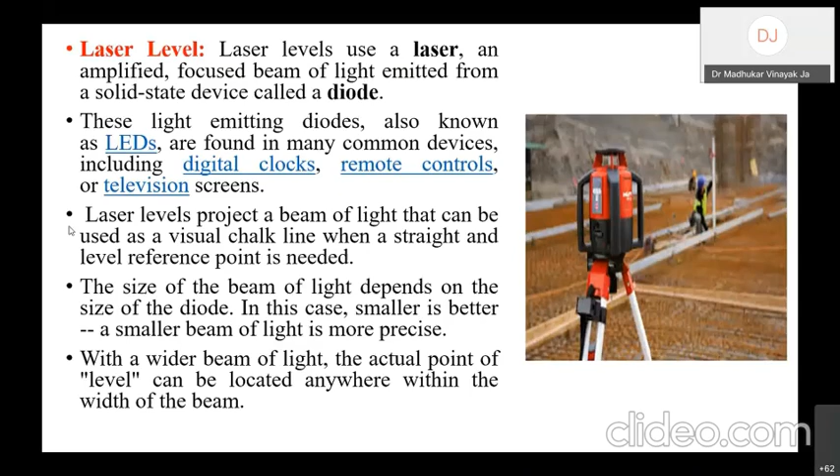This particular laser level can be used for different purposes, maybe for drywall installation, fixing of ceiling joists, or doing leveling work at night time.

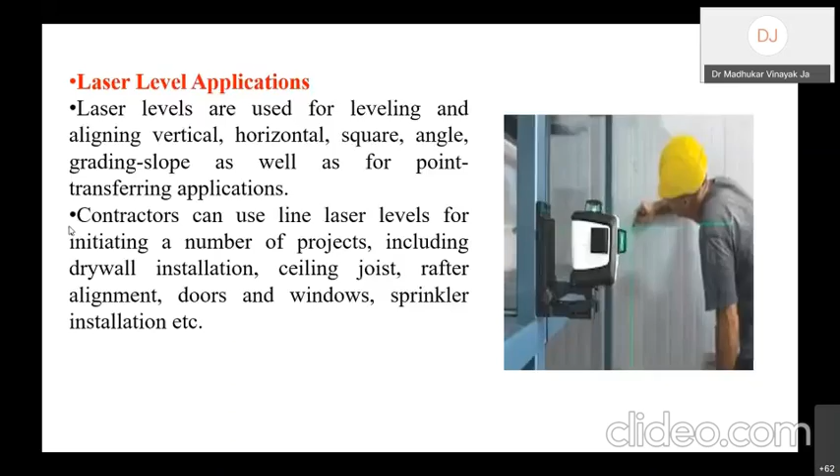Digital level is also one of the important forms of level which today we are using for leveling work. This bar-coded pattern is converted into elevation and distance values using digital image matching procedure within the instrument.

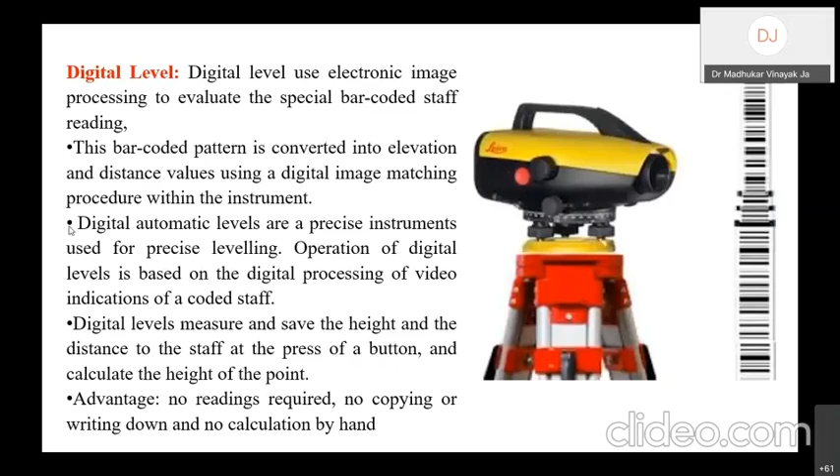In case of this digital level, there is a small computer or microprocessor, and with its help, whatever coded staff readings we are sighting from different distances get directly displayed and stored in the memory of this digital level. Whatever stored readings are there can be used by the computer for finding out the elevations of different points, or from those readings we can directly plot the contour map for that particular area.

There are two main components of this digital level: one is hardware, that is the digital level and the leveling staff, and another is the software. Just like a computer, there is hardware and software, and with the help of this hardware and software, the digital level works.

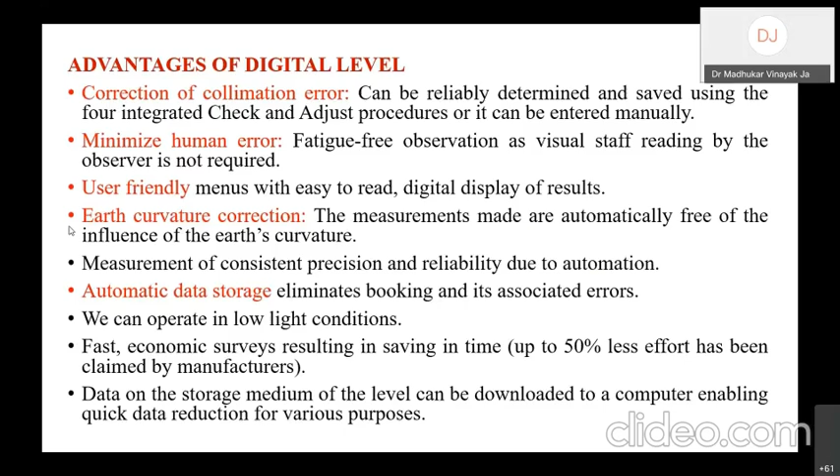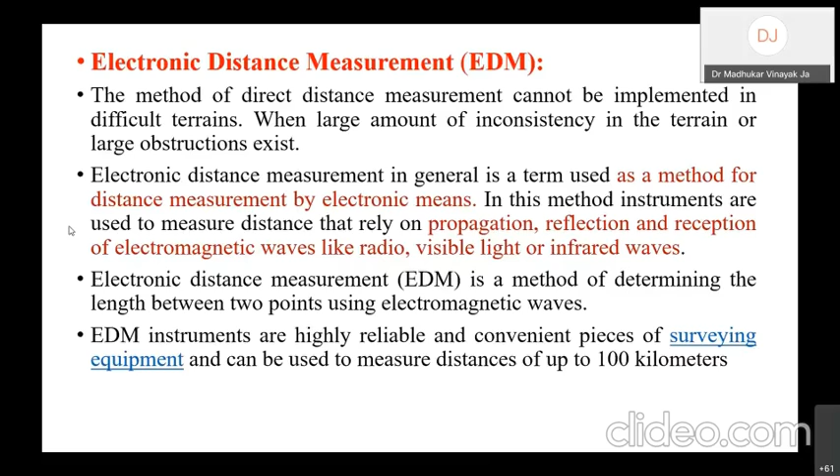Next is the electronic distance meter, but this electronic distance meter and other forms of distance meters will be delivered by the next author, so I will not deliver this presentation. This is all about my presentation, that is revision of surveying and the different types of levels which are used for leveling purpose.

So last slide, please, sir. Last slide.

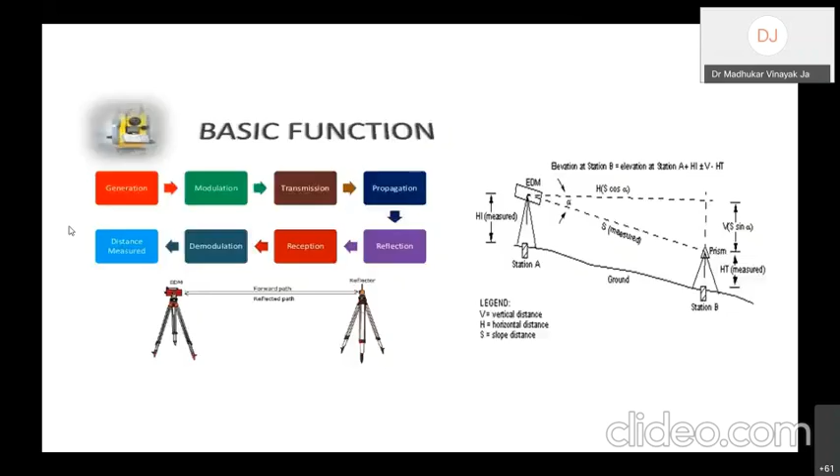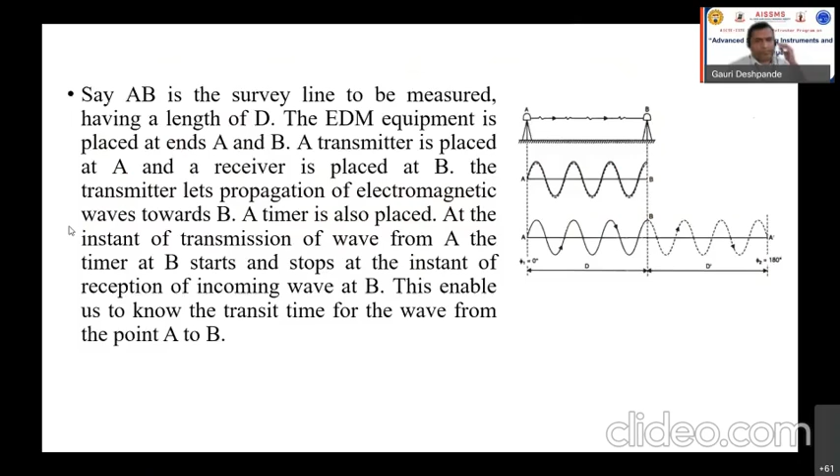So this is from my side. I am thankful to the organizers of this particular event for giving me the opportunity to deliver the lecture on this revision of surveying. Thank you one and all. So if there are any queries, please.